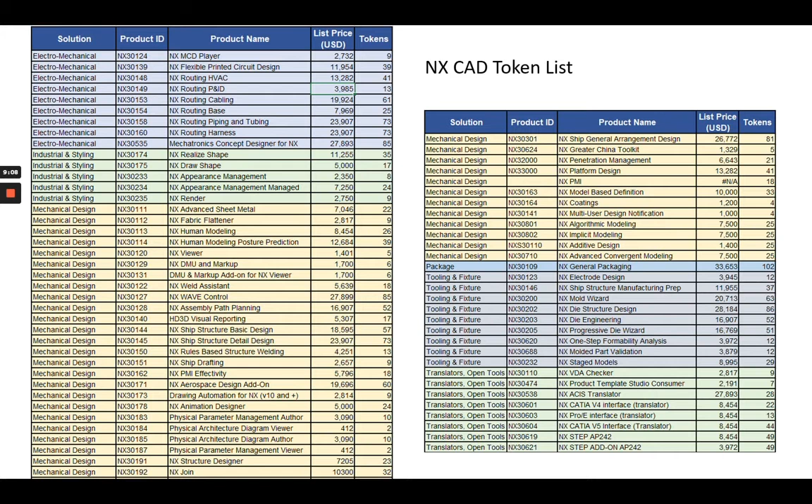New this year is NX manufacturing value-based licensing. It works very similarly. You need a base application. I've been told that CAM Foundation is a legitimate base application. It is subscription only again. Value packs are the same, 100 or 50. You need to buy 100 as the first order.

Another thing here is that you need to be on continuous release, at version 1965 or higher. That's a stipulation you need to be aware of if you want to get into value-based licensing for CAM. It works the same way. Some applications take a lot of tokens and some take a few. If you have a couple of 2.5 axis mill foundation licenses and want to use feature-based machining, you get the idea. It's very much the same as the CAD licensing.

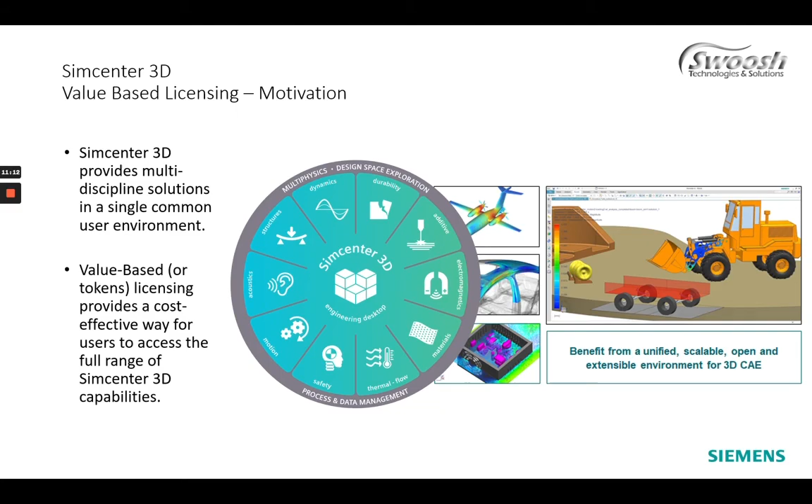The last thing I'd like to talk about before letting you go to lunch or a bathroom break or what have you is design simulation for NX.

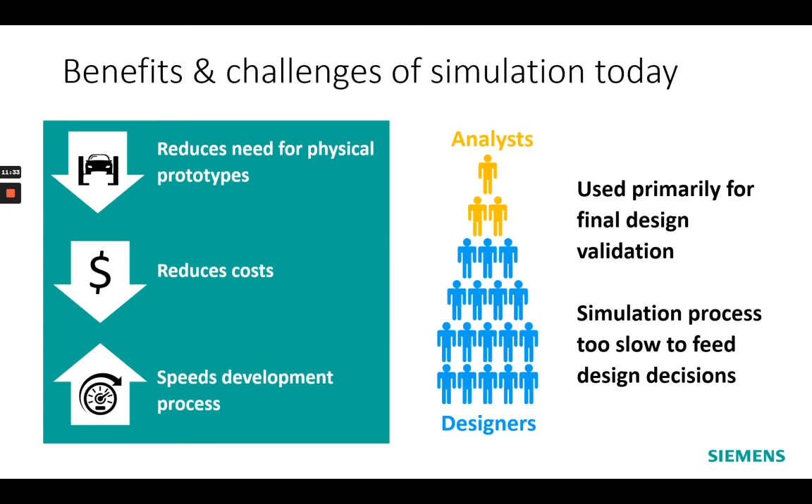There has been a great deal of challenge for designers to get products out because a lot of times the analysts can be the bottleneck. You have so few analysts versus however many designers you have. I can tell you from firsthand experience, I used to work in manufacturing, and we had one person using ANSYS and 45 designers.

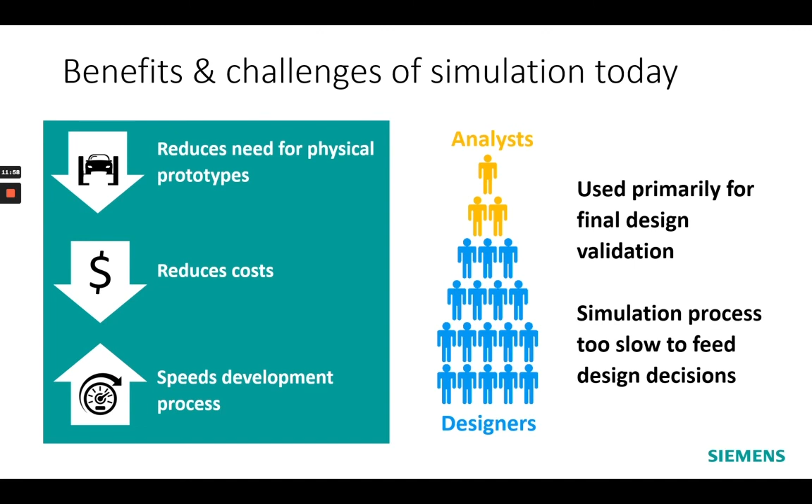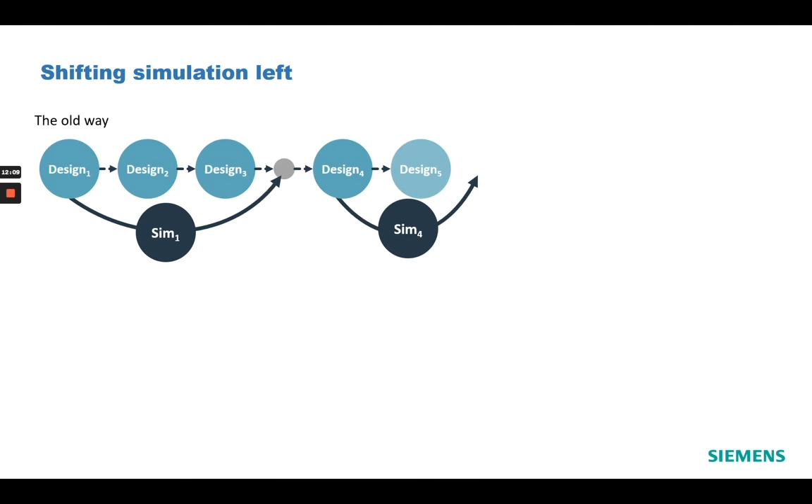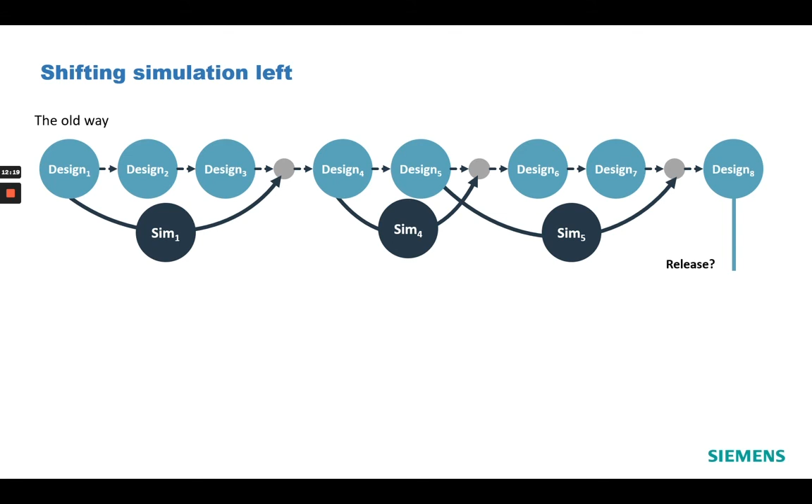So it can be a bottleneck a lot of times. In order to reduce the need for physical prototypes, reduce costs, and speed time to market, you can shift that simulation to the left, getting designers to do some simulation as opposed to the old way, which is a series of doing designs and sending them to simulation. While you're doing your design work, they're figuring out it's not good, so you have to go back to ground zero. It can be quite difficult and challenging, and as I said, a great deal of a bottleneck.

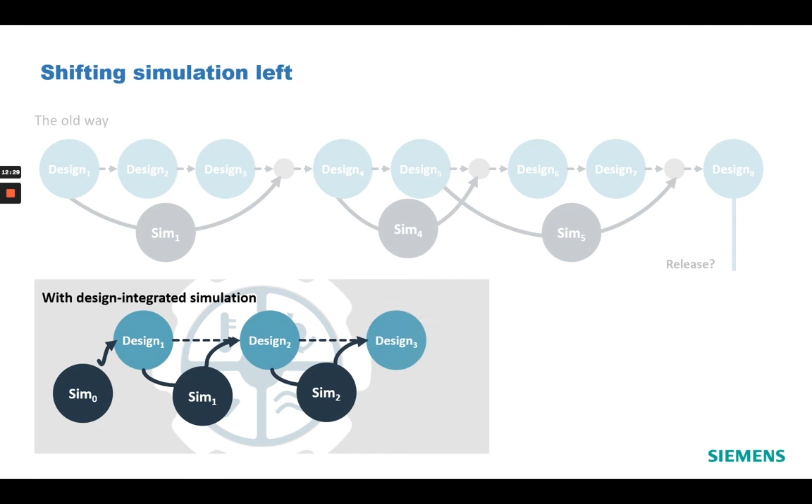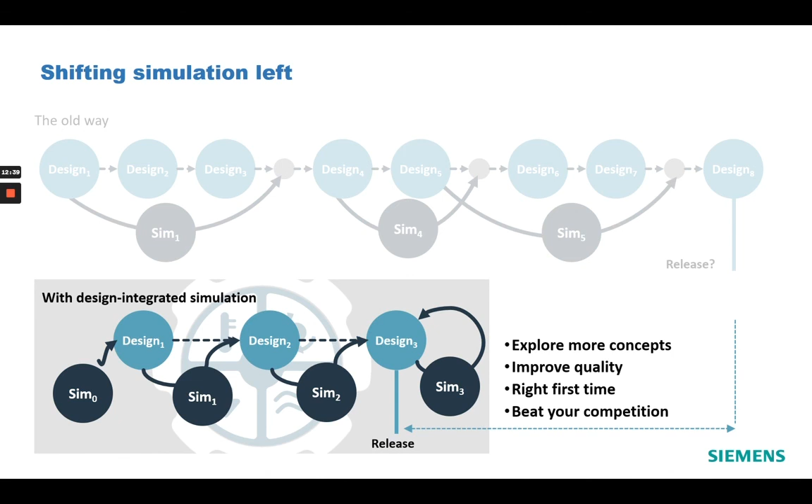With design integrated simulation, FloEFD for NX or other products built right into NX, designers can do simulation using a familiar tool and get those products out the door faster. There are so many tools you can do this with. So if you're an NX CAD user constantly being stymied by your analysis group, you can do topology optimization, structural FEA, thermal and flow, motion, vibration, molded part. These are products you can purchase and plug into NX and use yourself.